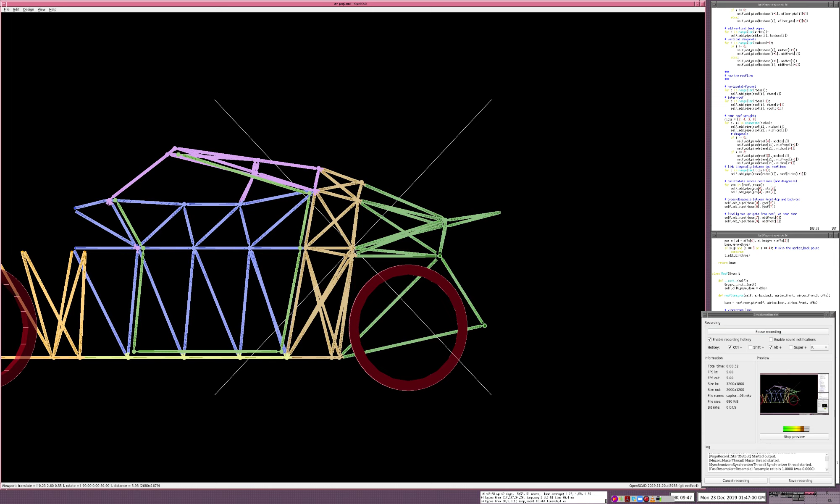Part 2. I just wanted to go over the joint system, which is a critical part of this design. Using Calfee design bamboo bike technique combined with Divergent 3D Microfactories node system, what I'm doing is some joints into pipes.

Let me just de-iconize that, otherwise it will go recursive. So what we have here is a central ball, which will be a cast hollow structure to save on weight, or it can be plastic 3D printed, or it can be metal 3D printed.

If you're doing it metal 3D printed, you can do the whole lot, including these pieces. When casting, each of these cone-shaped pieces which go into the ends of the pipes can be done separately.

Then you can have a jig which holds each pipe for each of these nodes, where a whole batch of these pieces will be available, and you just assemble them. It can be done with a robotic arm, etc. That's I think all done by hand. Of course, with 3D printing, that's not an issue.

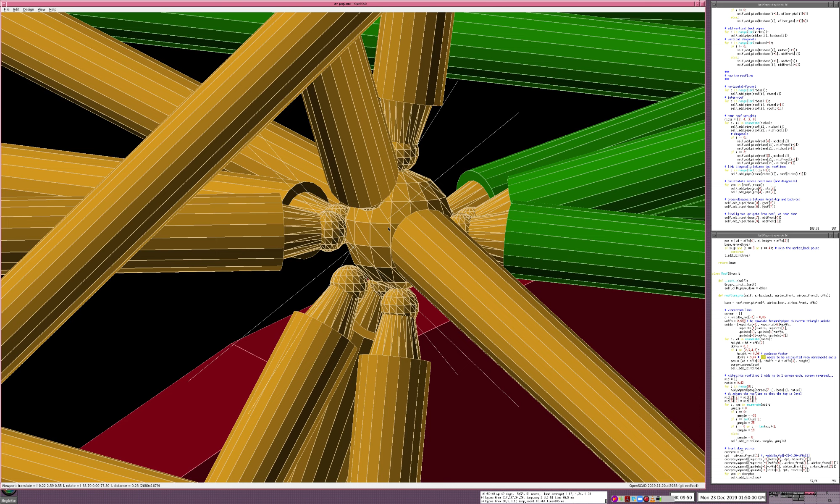If you make sure that the locking arrangements at each end of the pipe are in the opposite direction - so at the left end is clockwise and at the right end is counterclockwise turn - you can actually disassemble the entire thing.

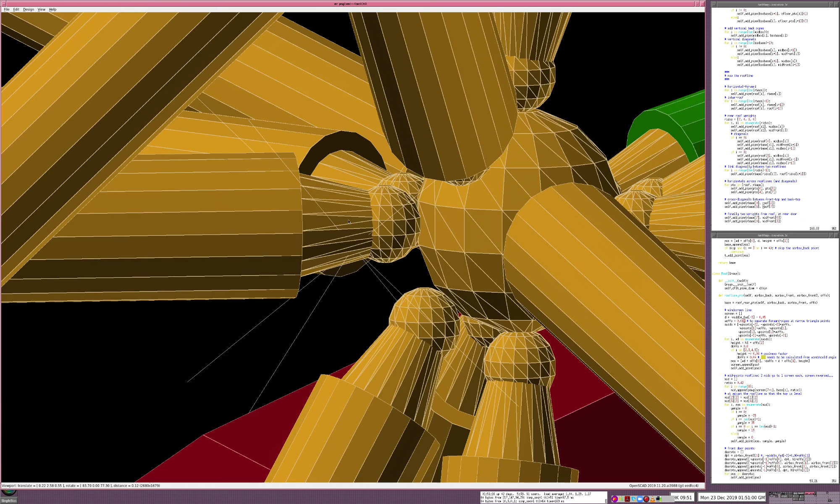So during assembly, you just twist one of the pipes into place, or if you make a mistake or whatever, something needs altering, you can twist it out rather than having to cut the pipe or undo the end bit. Now these end pieces, the intention is to screw them into the end of the pipe.

So on the inside there will be some threading, and then just like in the Calfee bike design, you take some resin covered cloth and wrap it around the whole thing, binding everything together. Right, once you're happy with the whole thing.

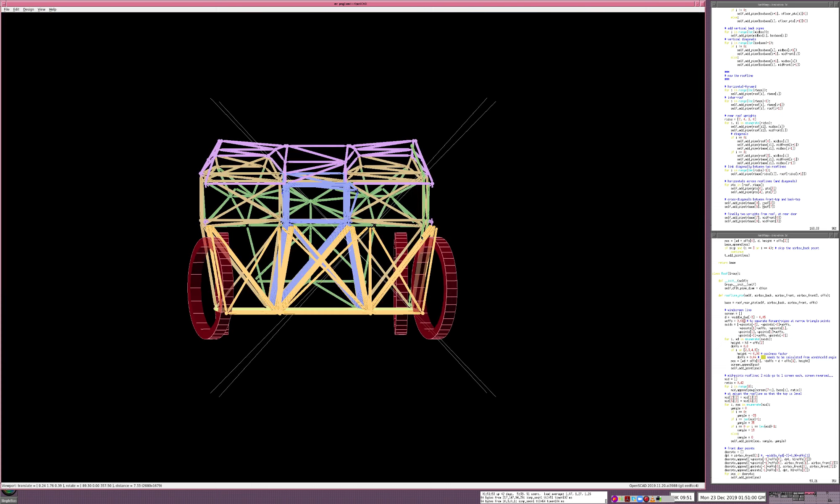Now I thought it's really quite difficult to do here, but I just wanted to give you an idea of some of the things. From this end, this is the air box here, there's one at the top and one at the bottom. Formerly I had all of the struts down this center here, going from front to back - they were formerly all slanting from top right to bottom left.

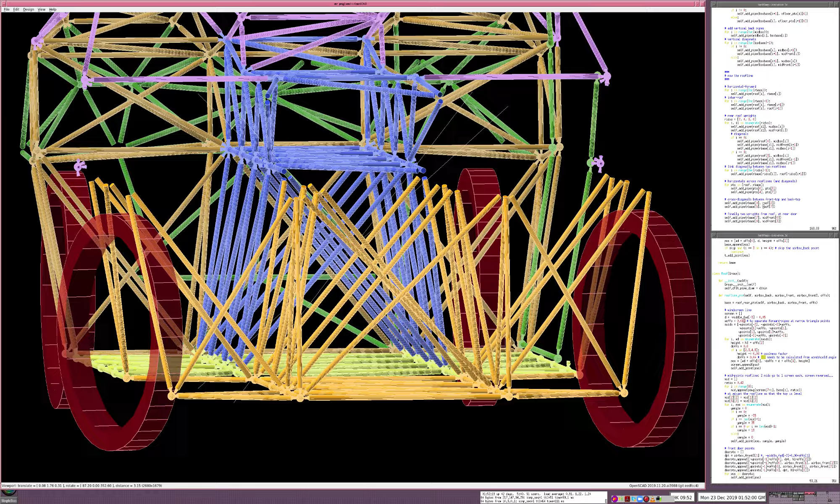I quickly realized that at the joining point - let me zoom in on one here - at the joint point here, what happens, unfortunately, if you do that, is that there's a pipe.

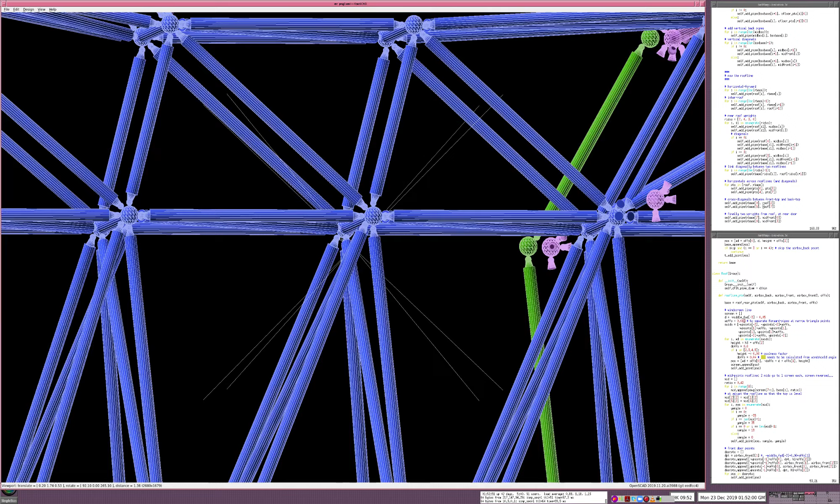This pipe here, if you have another one coming into here, there's a clash. So what I had to do instead was have this pipe going to here and that pipe going to that one, so you get the cross hatching that you see here. One of the pipes goes from top right to bottom left, with the other one that's connected to, offset by one, goes top left to bottom right.

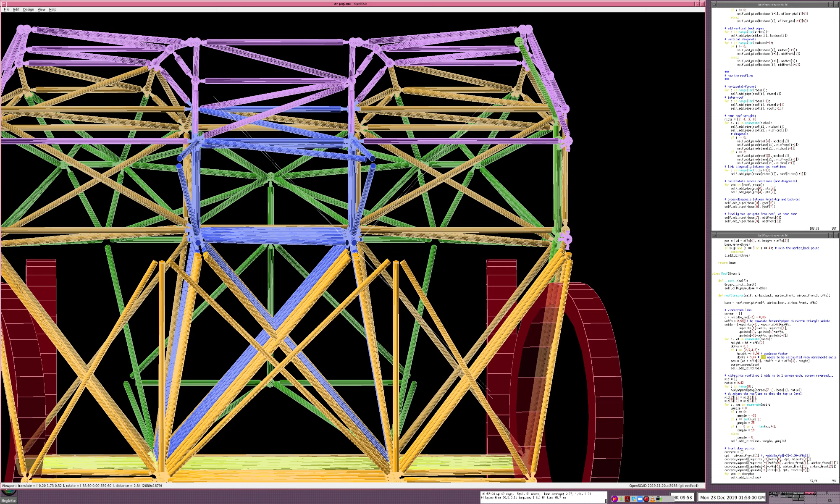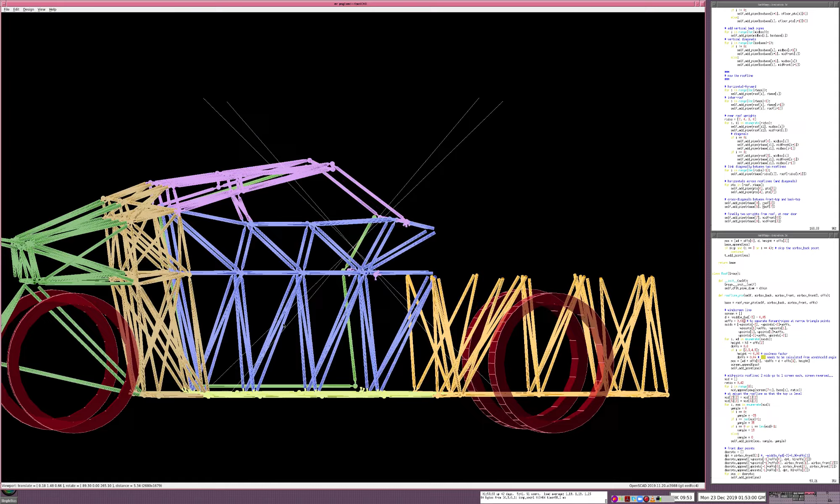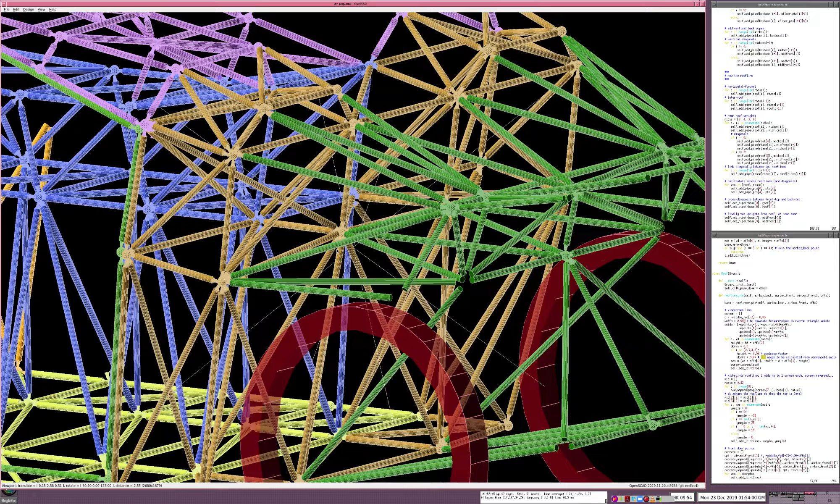Apologies, it's terribly difficult to see this even when rotating it because of the other things in the way - you can see I've removed some of them. I'm just having to go through and inspect every single one of these joints. I'm currently on what I'm calling the rear box, and we just have to go like this to get to zoom in on, say for example, this one, and then we can rotate to check.

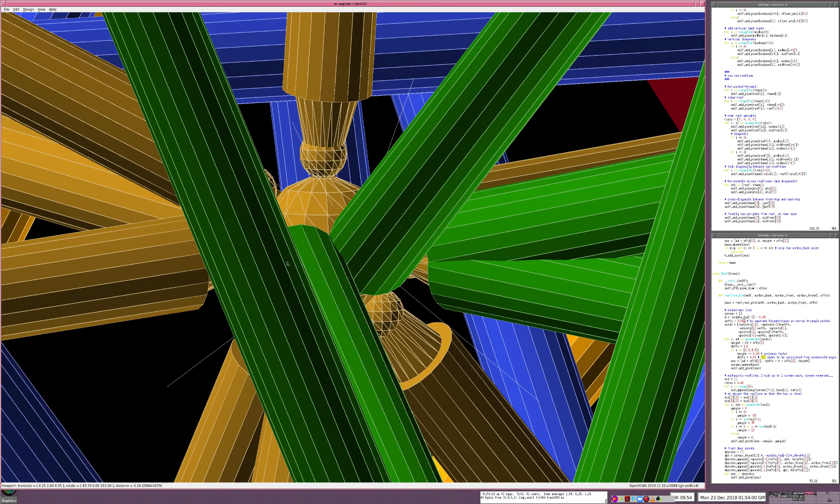Here's a clash, because I've been doing all of the brown ones for what's called the rear box. The green ones are for the rear section, and you can see that these two pipes clash. Okay, and these two as well, just here.

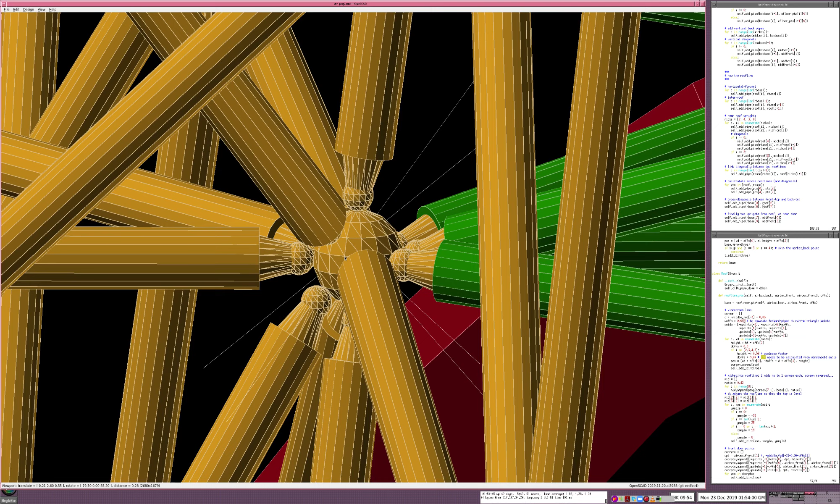So I created an auto joint system which, given the angle that the pipe is at, will automatically locate the suitable position for the attachment point, so this one to be joined on.

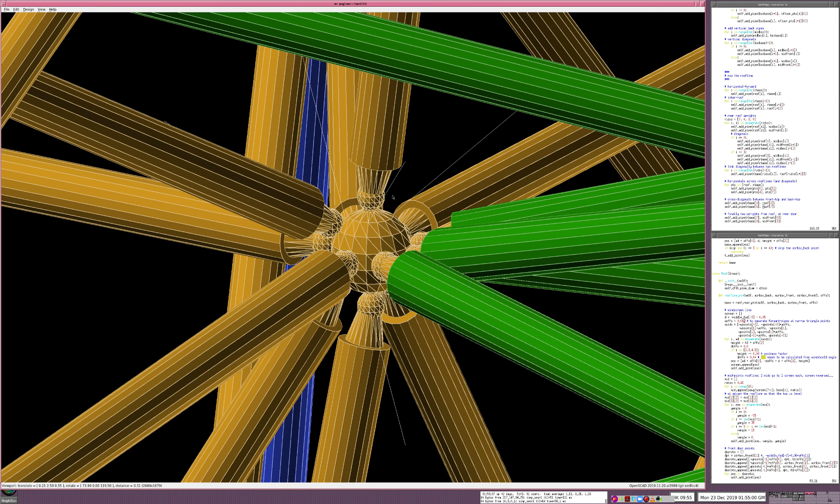So there are around here 1, 2, 3, 4, 5, 6, 7, 8 positions on the horizontal plane, and then there's an additional one in the horizontal plane around the z-axis, around the y-axis there'll be another 1, 2, 3, 4, 5, 6, excluding these two already, and then several more. Basically there are positions that pipes can be attached here, and without the automatic system I was spending far too much time trying to manually lay out - this pipe comes in here, therefore this one needs to come in there - and that was just a mess.

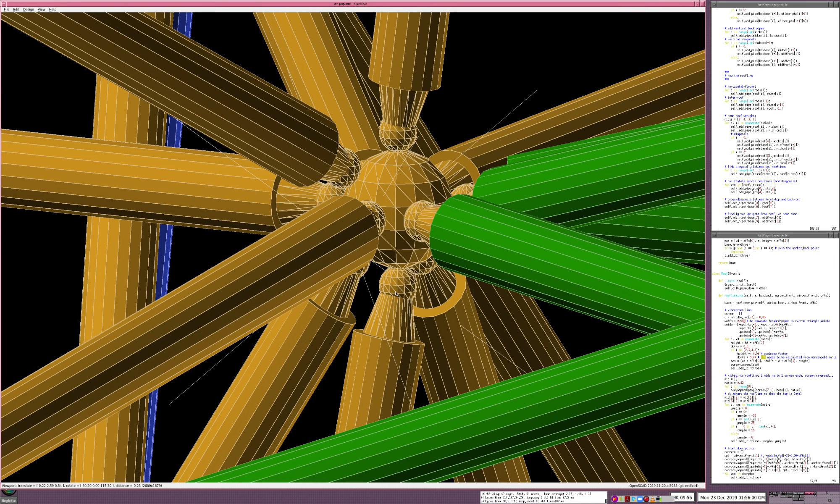So an automated system, and finally narrowing these pipes in with a cone system will give both the strength and the thing. I believe I'm now happy with all of the brown pipes for the rear box. I need to move on, but it's just one at a time, inspecting them here.

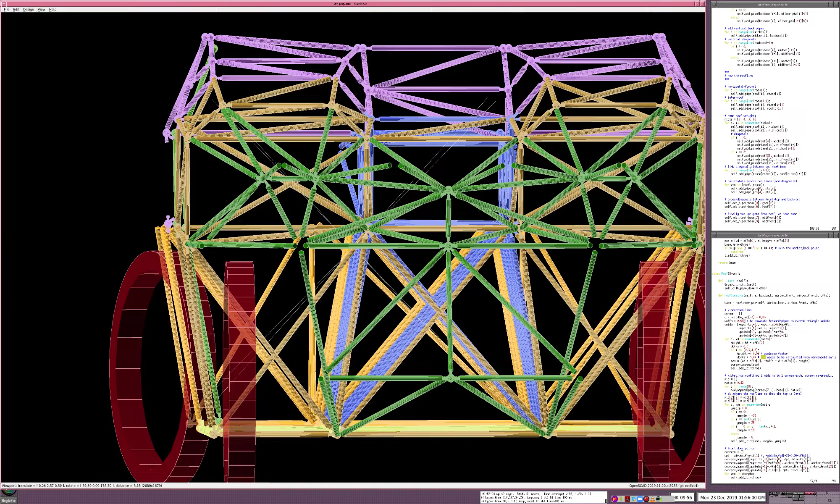Okay, now we need to go up to this one here, so bring that down to the center point, rotate through 90 degrees, and zoom in. Yes, that was that one. Okay, let's have a look at this one, and you can see none of the pipes are trying to occupy the same space. These two are okay, those two are okay. That green one there is a little odd, but at least it's not clashing space. No, I can't see any pipes overlapping, not even the green ones. Excellent.

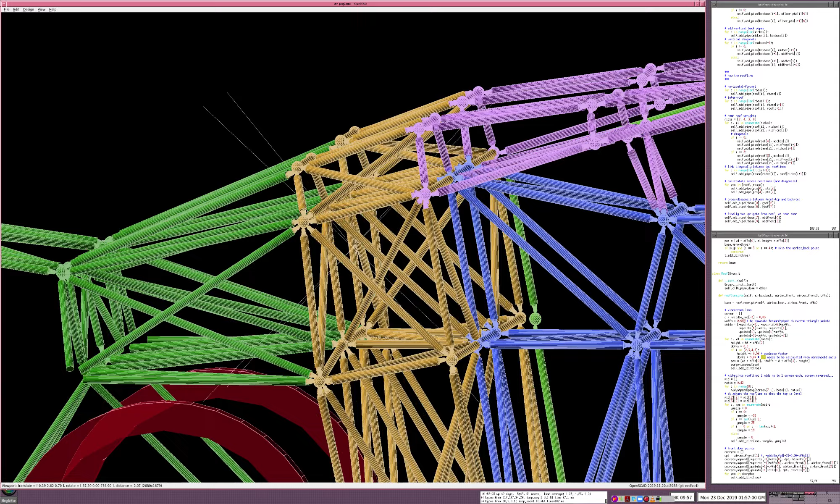Zoom out again, and turn it so that it's side on, and bring this point here. Now inspect this one. Ooh, that's very close there, but it's clear, so that's good. Ah, got one - right, that occupies the same space. We just have to sort that out. Let's have a look. Right, which pipe is that? That is the one on the bottom - that's this pipe from here to here.

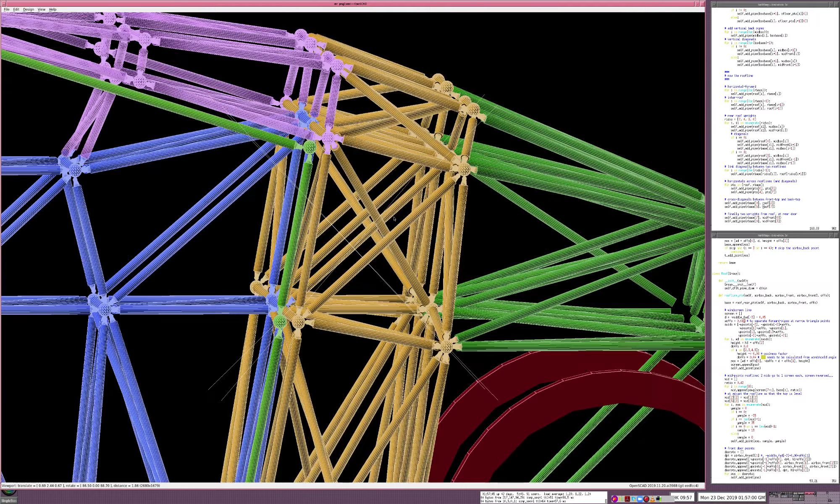Yeah. Hang on, wait a minute. Bring it side on. Bring it up to there. Let's have a look at this end as well and see if that one clashes. No, that doesn't clash on that end. However, it's not going to be good enough. Let's have a look - where can we take that? It's this pipe here that goes from there to there, and it's clashing in that space there.

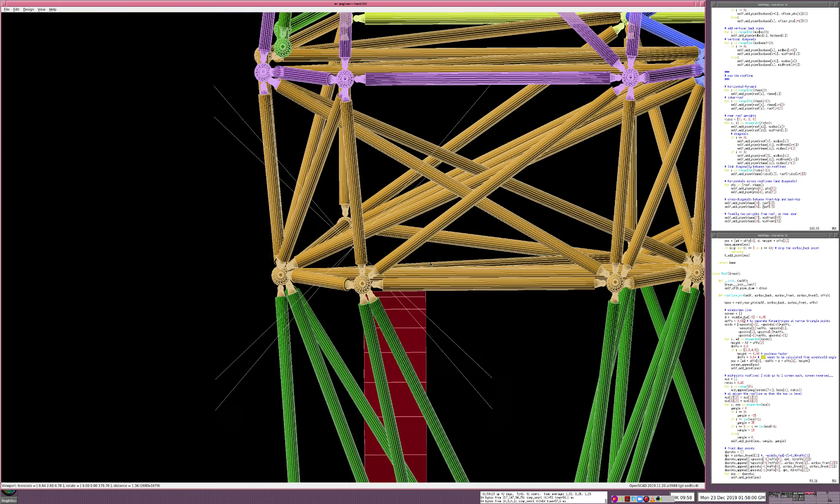And I think the best thing to do is to move this pipe, the one going from here across the center point to there, and turn it so that it goes from this central point to that one. Okay, so let's identify that pipe - let's go to the code.

Actually it's easier to do it by process of elimination - you'll see in the code on the top right hand corner. Let me just expand this to huge. Return that and run the thing, and some of the pipes should disappear. Yes, they do, there we see. Now the roof line - okay, process of elimination again.

We're adding some in. Aha! So inter roof pieces horizontal forward, and it's going to be this one. That's the one, there we go.

Right, so what we want to do is go instead from roof I+1 to the base, and let's see what happens there. Ta-da! Interestingly, that does all of them, which means we have to change the thing. So what we're going to do instead is this: if I equals 0, that, else plus 1 - so we're going from top to bottom on those layers.

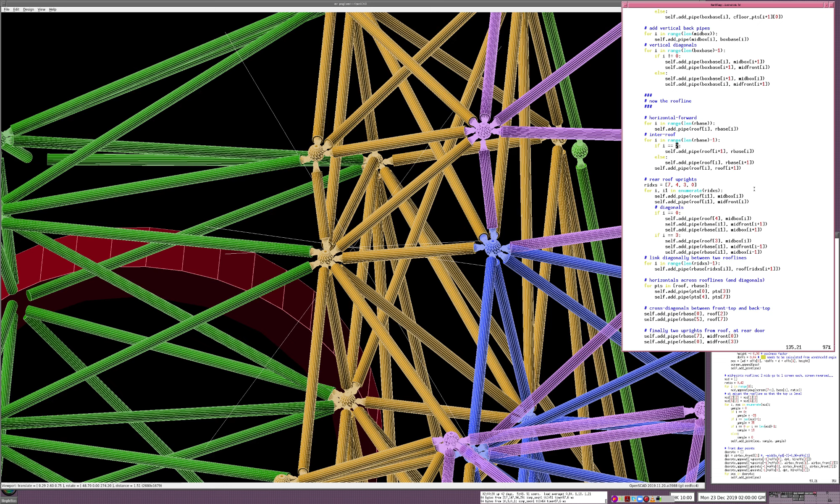There we go, nope not that one. If I equals 1, if I equals 2, there we are, brilliant. Okay, so that pipe is now going from there to there rather than there to there. Watch that - equals -1, okay so that will always be false. So there we go, that's the one we needed to flip over from those two to that.

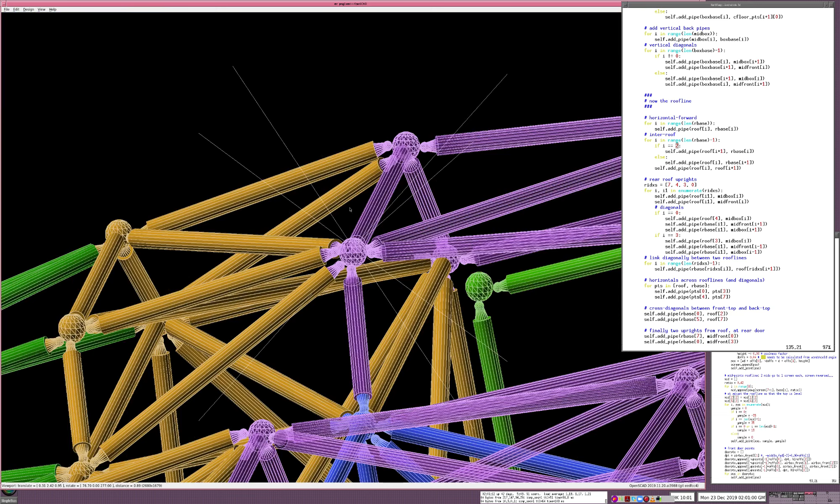And now let's have a look, let's inspect this point here. Bring that in to there, and now we can zoom in on it, and if we look in there - that's missing, hey fantastic. And let's have a look at the other end. Yep, that's clear. And now let's inspect this one again, bring that in, turn it through right angles, rotate, there we go - we found another one.

Just on that roof point there, just here, so we'll do that one later. Can you see there's maybe those two touching? Those two here? Behind that, let's spin it round. Yeah. No, they aren't - we're looking upwards through the bottom of the car at the moment.

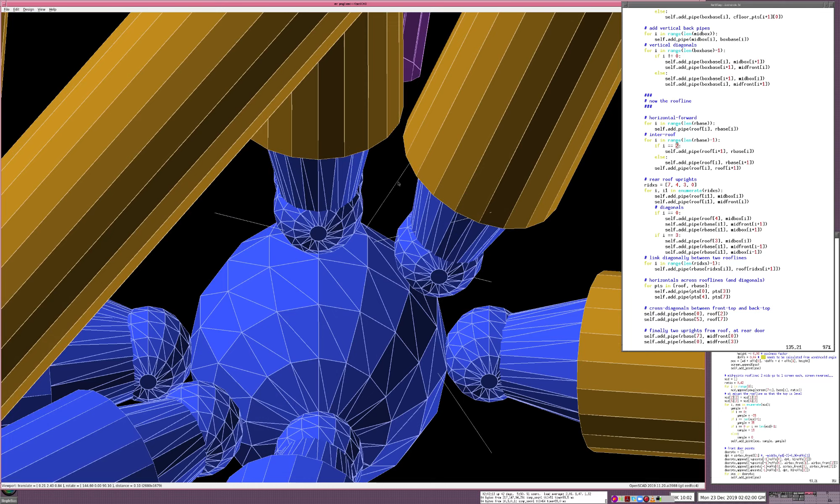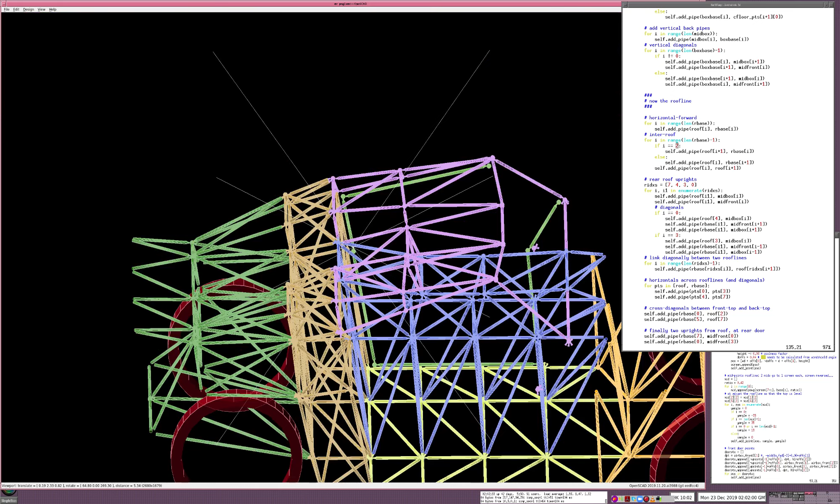No, there's no way I would want to compute this sort of thing in software. I mean, you could run some software which will - we're looking to the front of the car at the moment, that's to the side. We could actually compute this using software which calculates whether these are clashing or not, but to be honest I'm not that keen on doing that - it's 3D calculations, with what clashes with what, etc. Yeah, it's a lot of work.

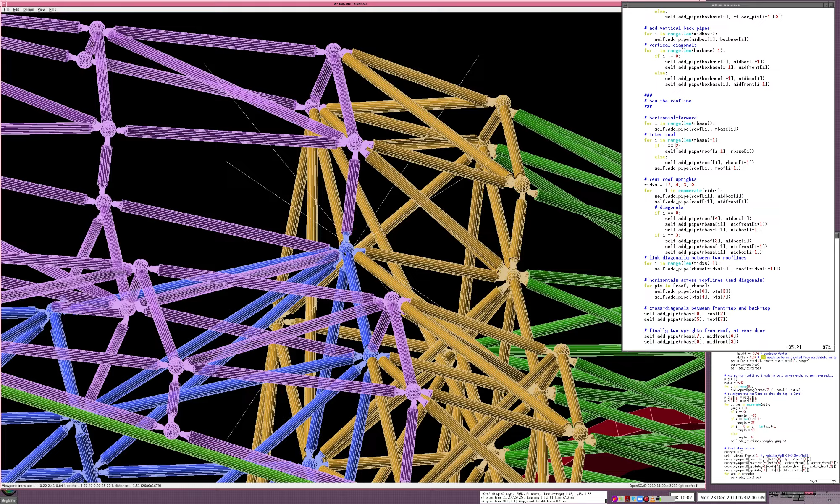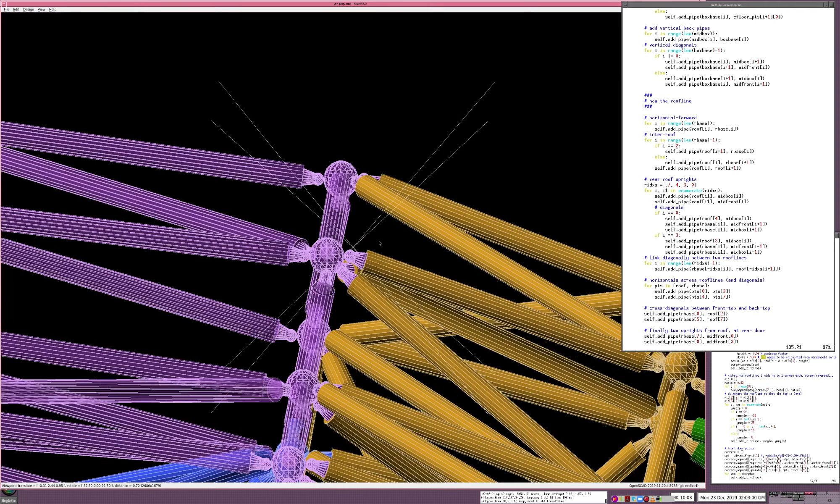Just before we go, I'm going to look at these ones over here as well to make sure that this one has been changed to go in that direction as well - that's the other side. And have a look at this one as well. Despite the fact that some of these are symmetrical, they're not actually in all cases symmetrical, so let's inspect the gap between those two here. Yep, there's nothing clashing there. See, that gap is missing each other - it's not actually symmetrical, so we do have to inspect every single joint.

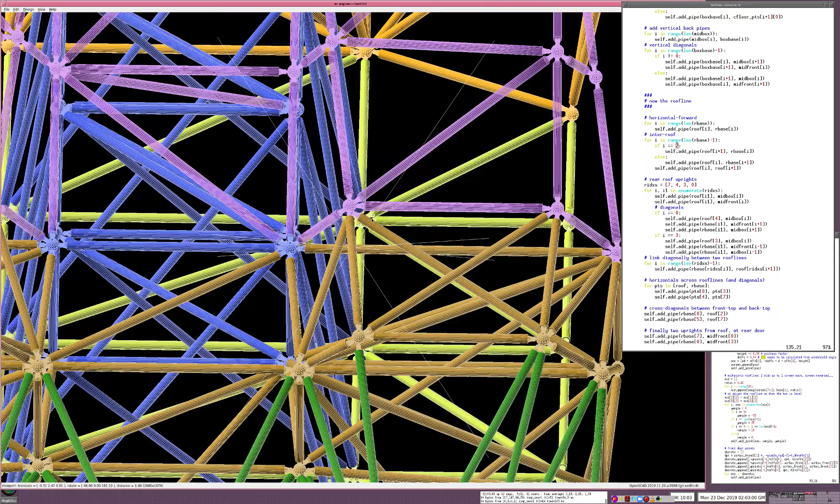It's quite ridiculous - I'm amazed and have a huge amount of respect for people who do 3D vehicle design now that I've done this. I'm honestly not surprised cars cost such an amount of money to design.